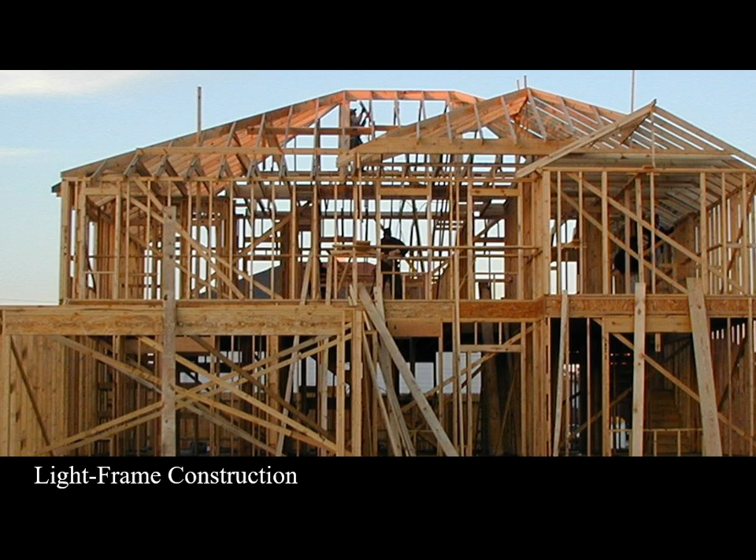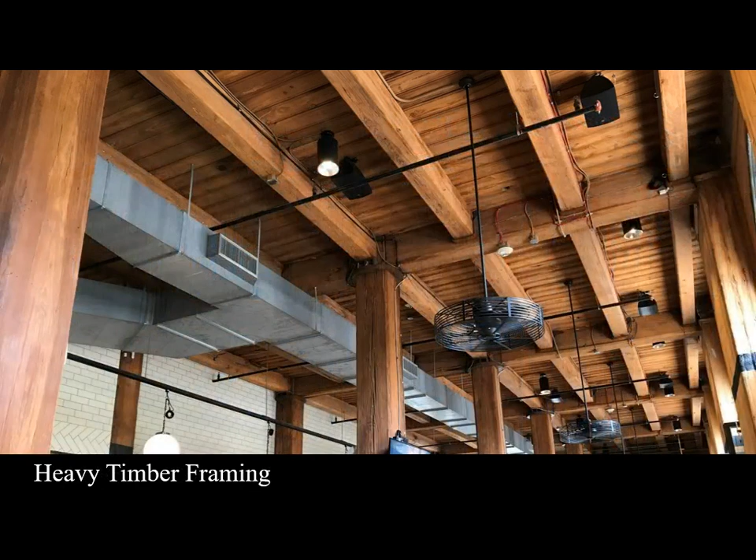When we think about wood construction, this is probably the first thing that comes to mind. Probably the predominant use of wood is light frame construction and residential work. We step back a little bit: heavy timber. This is a photo from the Cupples buildings in St. Louis, where our office is at Mackey Mitchell. These were built around the 1890s.

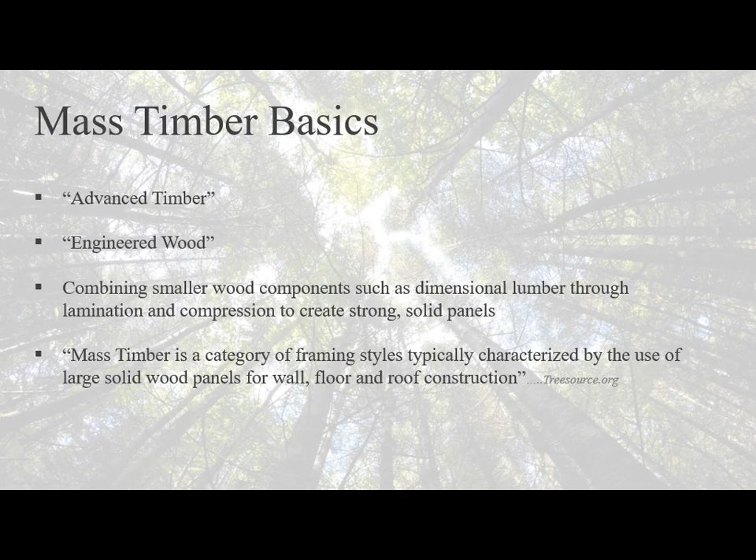You might hear mass timber referred to as advanced timber or engineered wood. Essentially, the concept is combining smaller dimensional lumber in a way to make larger panels. Probably the earliest example of an engineered wood is plywood. That's been around for quite a while, the idea of taking veneers and perpendicularly laminating them together, and it achieves great strength.

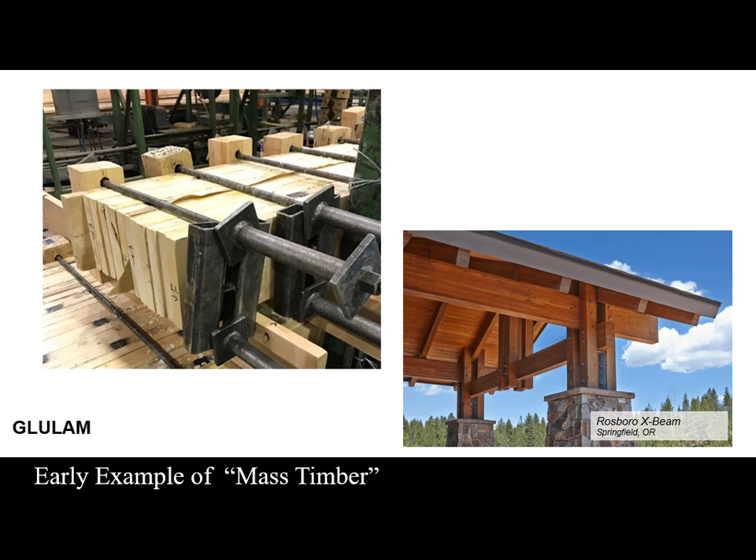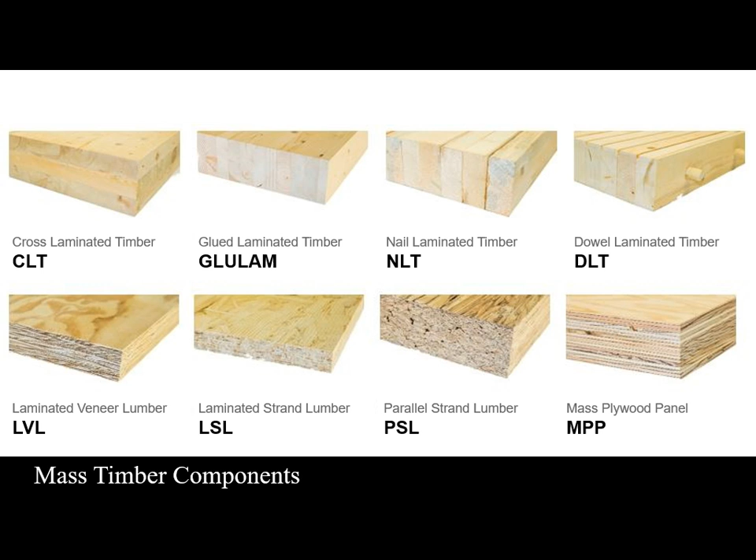The idea of biophilia, which is defined as the love of life or living systems, and the innate nature of humans being drawn to living things. There are health and well-being benefits to wood. Ease of fabrication: wood's a soft product, it's easily manipulated. Rob will probably touch a little on speed of construction.

One of the things that has helped advance this technology is that AHJs and other code officials are catching on to the capabilities of wood. There are a lot of myths about why wood maybe isn't the best material to use depending on the project, because it's combustible, it doesn't mix well with water sometimes. There are a lot of reasons. It's maybe not as strong, but in reality it is very strong when you think about the strength-to-weight ratio.

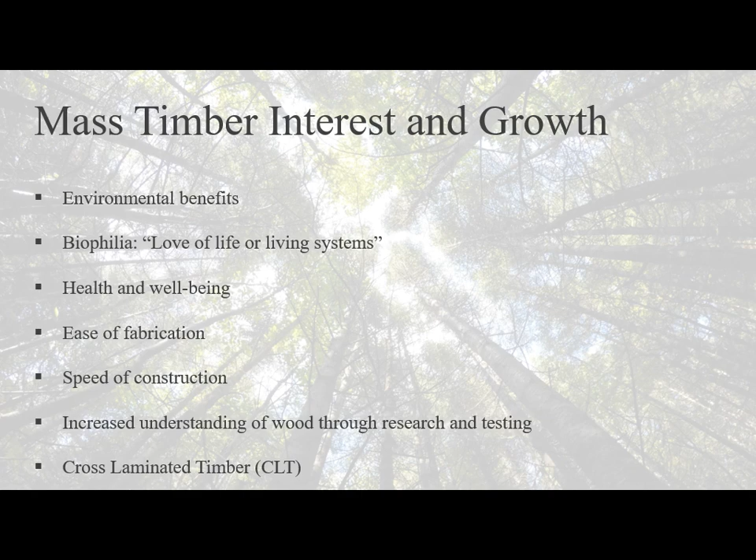Just being involved with this project, and Rob can attest to this too, we get calls all the time to talk, to ask questions, and to be on teams to pursue work, because it's really a hot topic and a very trending, popular construction type that's gaining a lot of momentum right now. So it was really just a great project to be involved with.

These CLT panels have been a big part of why there's this new boom in mass timber. These panels now can be made greater than 10 feet wide, up to maybe 12, and up to about 60 feet long. Really, the limiting factor more than anything is just how you're going to get it to a job site, how you're going to ship it.

So they're in a plant. They go through these CNC machines, and you can get very, very detailed, and tolerances are within fractions of an inch, which is great that you can do this in a controlled setting of a factory, and it solves some of the problems at the job site.

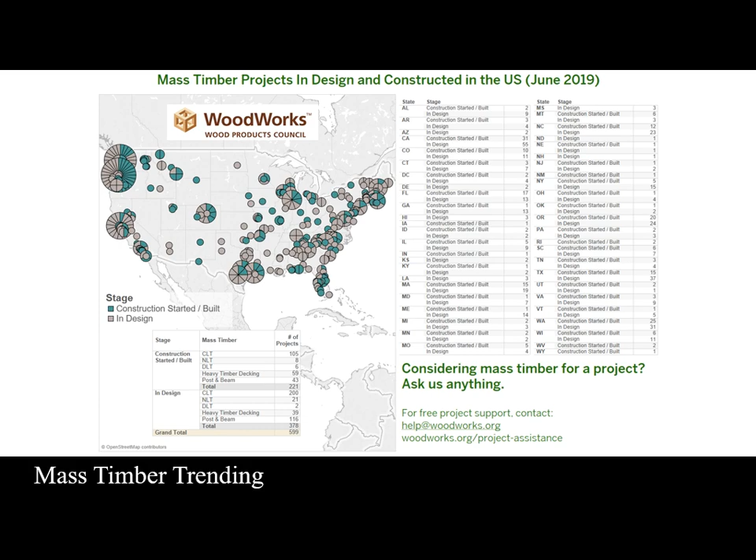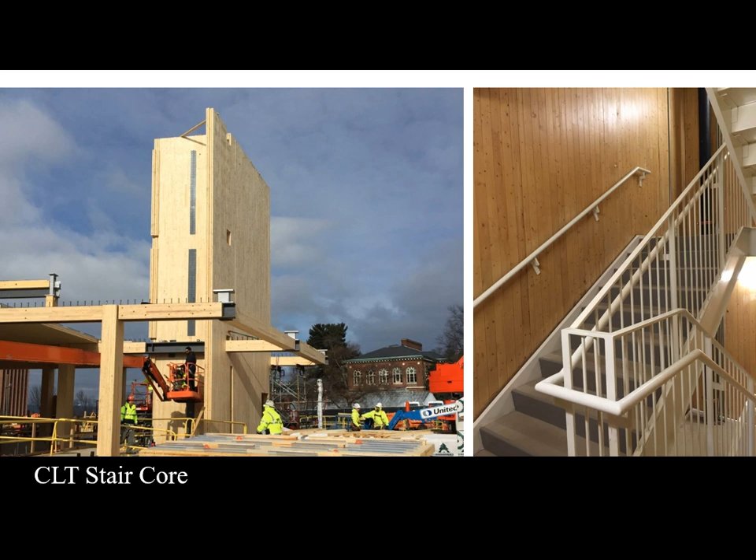Interesting, just some examples of mass timber in place. This is at the University of Arkansas with the glulam columns and beams and with CLT shear wall panels. This is Vancouver, load-bearing CLT shear walls. We even use them for stair towers, rated stair enclosures. This is at Amherst, UMass. This is a project by Leers Weinzapfel.

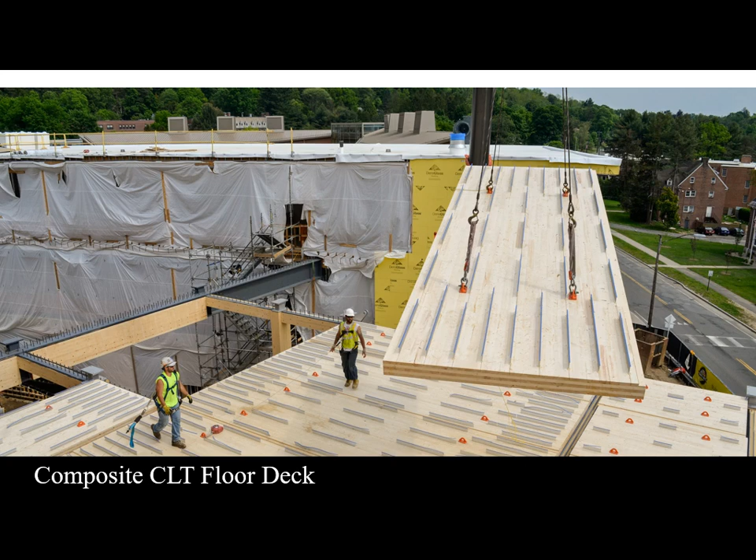Same project, showing them setting some floor panels. Typically you're going to put a topping layer on top of a CLT panel, because wood's not going to be a good material for your finished floor, or to take adhesives for whatever your finished floor might be. So you're going to use a topping. Typically at Arkansas we use 1.5 inches of a gypsum topping. We didn't need a composite slab there.

But this was an example of where they ended up using a lightweight concrete in a composite system, where those are steel fins that are embedded into the CLT, and when the concrete forms around it, it forms a composite system. And then we use them for roof panels as well.

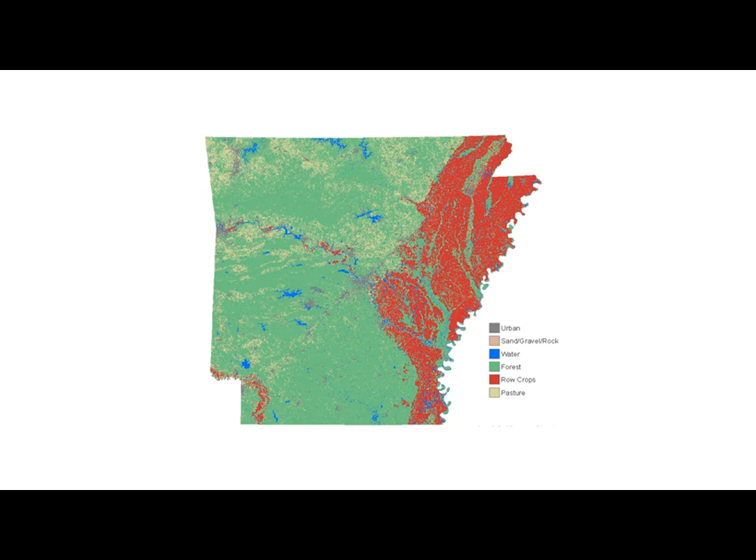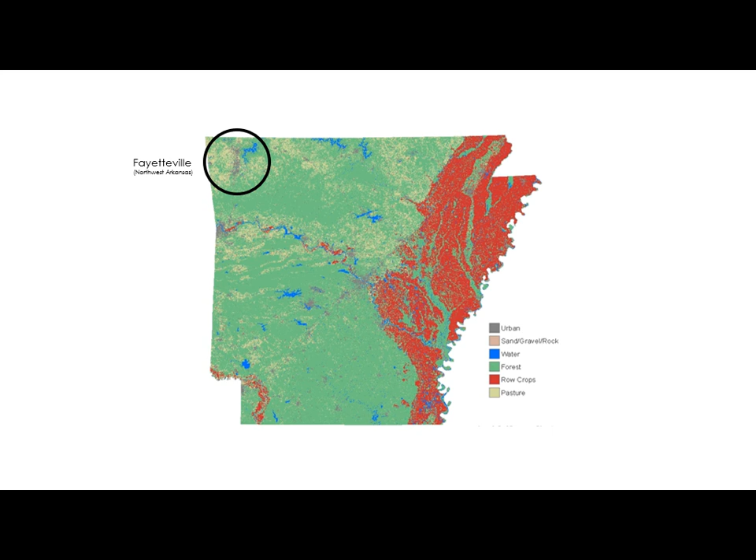So talking a little bit about the project that we came to explain, everybody knows probably where Fayetteville is in northwest Arkansas. We're only a couple hours away from it here. So the state of Arkansas, amazingly, has 4.7 million acres of certified forests. And so that is part of the interest and the reason why the university wanted to pursue that.

Dean Peter MacKeith at the School of Architecture sent some information to me. I'm going to read it. This speaks to kind of what their motives were for pursuing this building. Advanced Timber Technologies, or more simply mass timber, appealed to the University of Arkansas on this project for its triple bottom line deliverables of demonstrable educational value, demonstrable environmental value, and demonstrable economic value.

The Adohi Hall is not the first mass timber campus facility at the U of A. That distinction belongs to the Library Annex building, which is the photo I showed you of the example, which was dedicated in the fall of 2018, nor will it be the university's last mass timber building. There are at least 2 more envisioned in the next 5 years. But it is the first to be so explicitly specified in the RFQ, the largest mass timber campus building constructed to date, and the one most greatly anticipated, given the scale of the budget, the prominence of the site, its multi-story height, and the diversity of its program.

Mass timber appealed to the university and its design, engineering, and contracting partners for this project for its simplicity and speed of construction, its versatility in both short and long span conditions, and its psychological and physiological effect on the interior quality of the spaces. The promotional value of the project should not be underestimated either, as the project signals a university committed to progressive design and innovation, to sustainable design, and to a vital quality of on-campus residency.

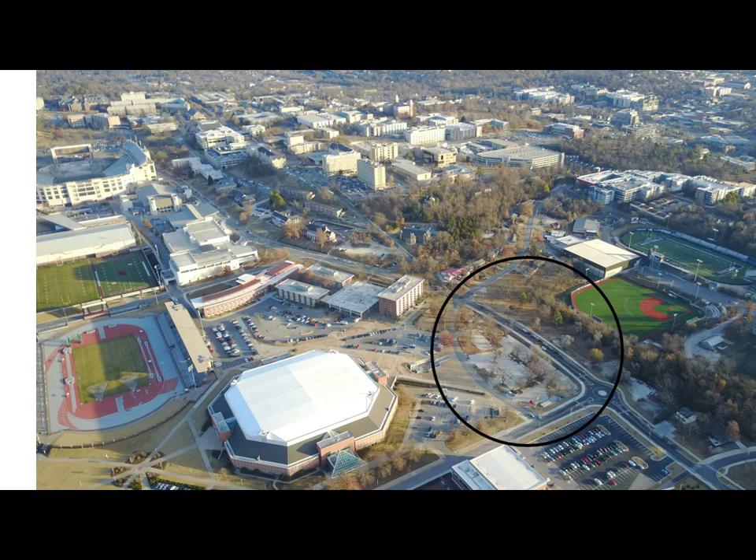Of course, Arkansas is a beautiful state, and the Ozarks are a tremendous asset. One of the common themes of our project was a cabin in the woods. And so in our early planning stages for the building, I mentioned earlier that we had a mix of semi-suite units and traditional bedroom units. This isn't the actual unit that we ended up with, it's just one of our design images.

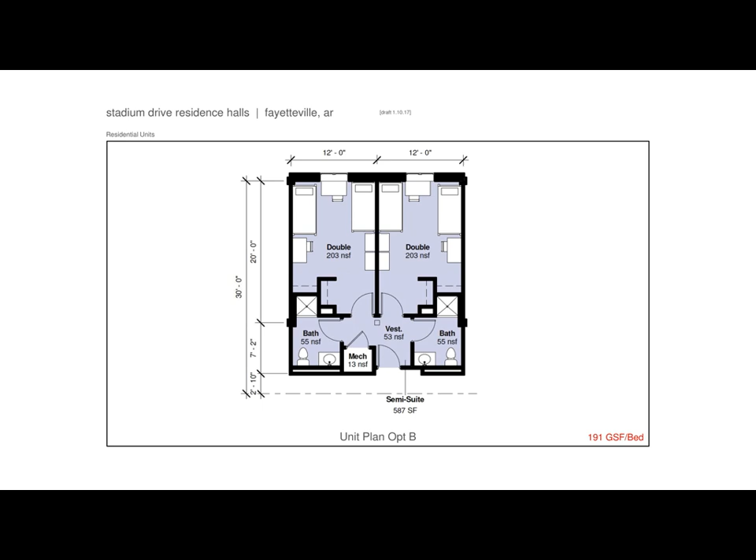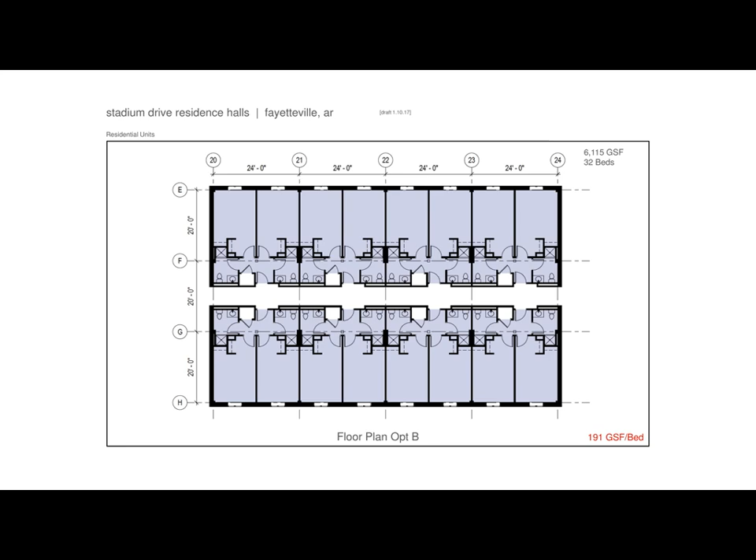So in a double-loaded corridor, these bedroom units become so important in residence halls, and the efficiency of them, because when you're repeating these units times 100 or times 200, just a few inches here or there makes a significant impact on square footage and cost of the building. So one of our early focuses is always to be very efficient with our planning. The most efficient layout for a residence hall is typically a double-loaded corridor. So you create these bars.

How mass timber factored into how we laid out our typical units was we established an 8-foot by 40-foot as an ideal CLT size for our floor panels. That worked with the grid spacing that we're showing here, 12-foot demising wall center to center between bedrooms, and then a 40-foot wide building for the CLT panel. Now, there are some manufacturers that had the capacity, even back when this was built, to make them a little bit bigger, maybe 9 or 10 feet, and you can get them even bigger and longer now. But we didn't want to rule anybody out, and we wanted competitive bidding, so we picked a common size that we knew a lot of the fabricators could provide and bid on.

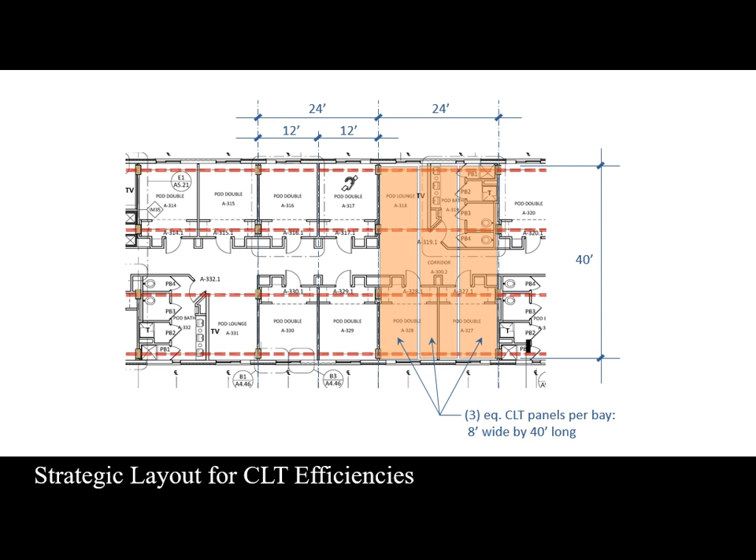So this module worked out great for our traditional bedroom wing, what we call our pod wing, that utilizes community bathrooms. With three 8-foot wide panels by 40 feet, very efficient, not a lot of waste, not a lot of cutting. On the semi-suite wing, because the building's a little bit wider with bathrooms at every bedroom unit, we'd use a full 40-foot panel, and then cut a full panel in half and utilize it on the other side of the building. A very efficient way and very thoughtful from the very early stages. And regardless if this building was going to be steel or mass timber, this was going to be our grid spacing. So we carried this through even with our steel concept as well.

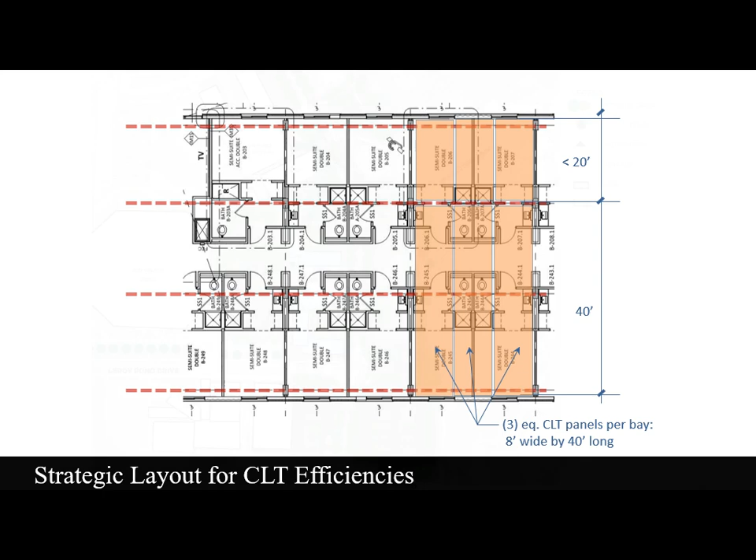Just showing you some design images of how the project evolved. We decided, based on the linear nature of the site, the slope, and the quantity of beds, that it made sense to split it up into two buildings. The north building was called Building A, the south building was called Building B.

Is this a pointer thing?

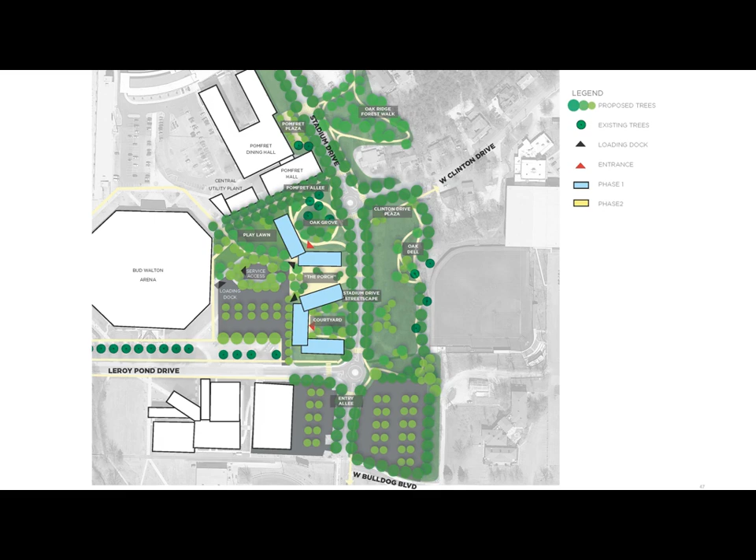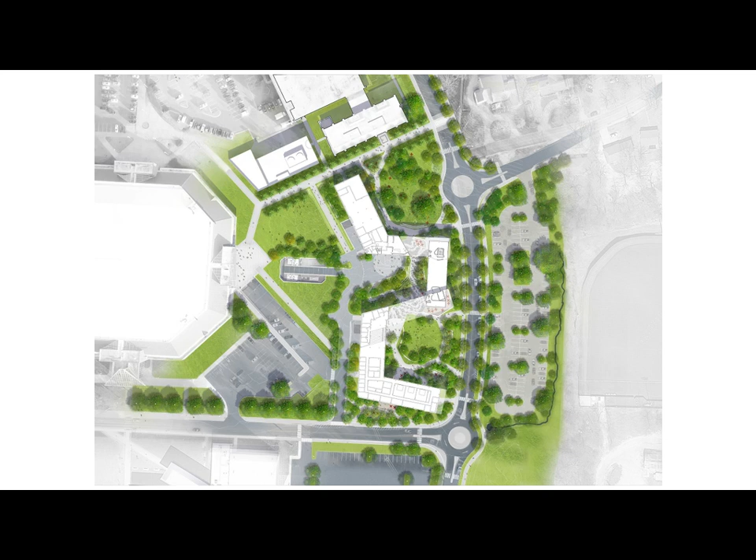One of the interesting things about the configuration of what we ended up calling a serpentine scheme: we looked at several schemes, but this is the loading dock for Bud Walton Arena, where the semi-trucks have to service the building for deliveries. Our site is butted right up against that drive. So the shape of our building had to take into consideration that the semis need turning radius and to back up. So we factored that into our design. Just a little bit of a blow up of it.

Pomfret, which is next door, is another residence hall. They hadn't built a residence hall, and this is the first residence hall in 15 years at the university. So, along with being a residence hall, this was intended to be a living, learning community as well.

So, in the south building, the B building, these spaces were designed for the arts, and so we've incorporated some maker spaces, faculty offices, there's music rooms, there's some video production and audio production studios, and then there's like a movement studio or dance studio, and then there's a really nice kind of a tiered seating with a high volume amphitheater space here.

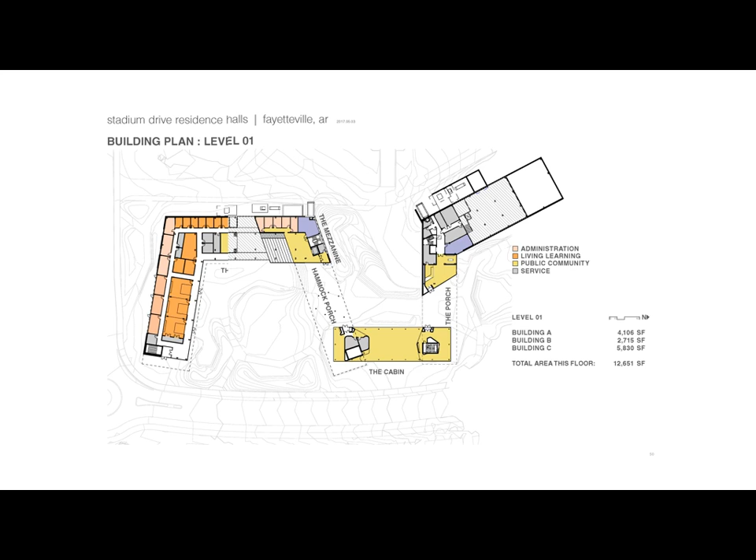And in the north building, here's the main entrance to the residence hall, so this is where the students will enter. And then the cabin, the connecting building, is only a one-story building, which is kind of the social heart of the building where everybody comes together, very transparent. Typical residential floor, again, I mentioned the wider wings are the double semi-suites, the more narrow wings are the pod wings.

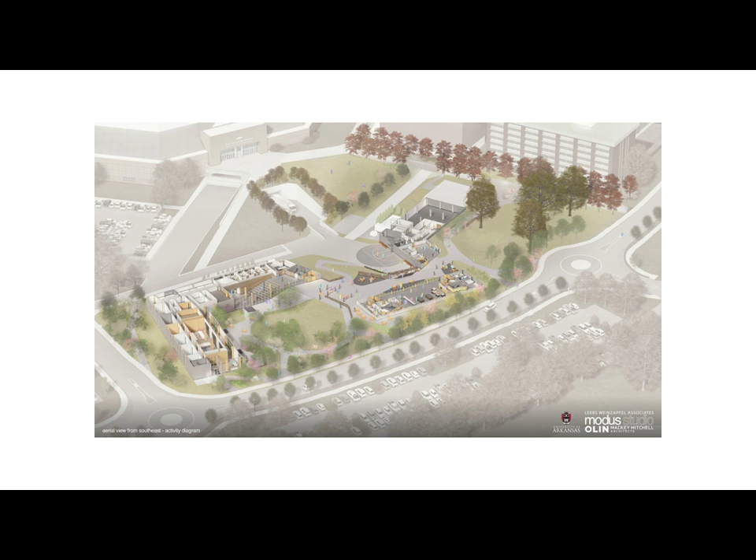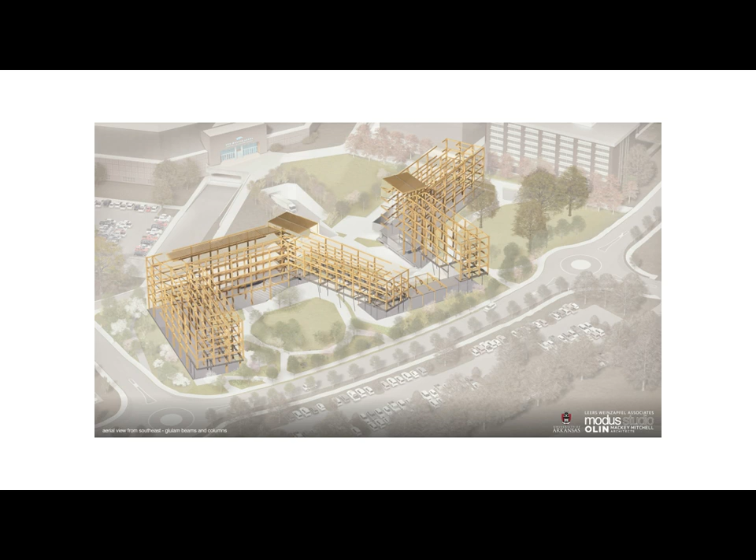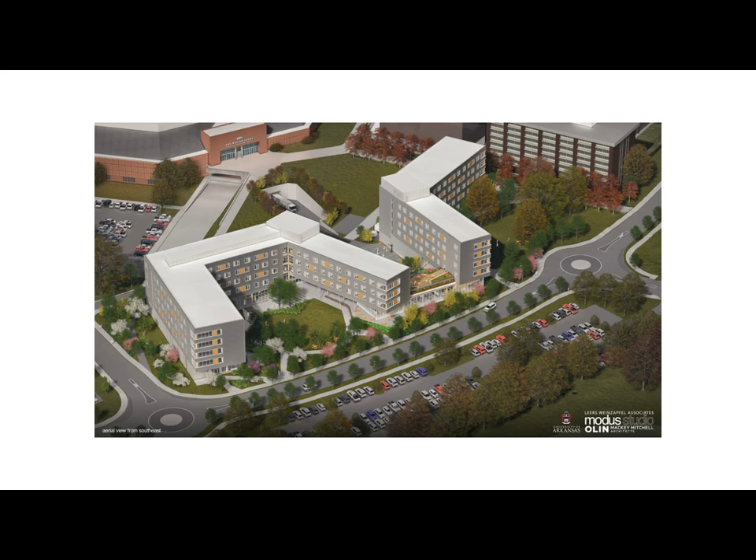Here's an axon of a cutaway of that first level, showing the makerspace and arts department with this tiered amphitheater. Here's the cabin, the social, kind of the living room, and then the first floor of the res hall. And of course, here's an illustration of the glulam post and beam structural system. And then we layer on our CLT floor and roof panels, and then ultimately one of the final renderings of the completed design.

And the university was a little bit leery about, one of the hesitations for using mass timber was, we're not familiar with it. We're worried about it. It's flammable, all those things that a lot of people are concerned about. So ultimately, we didn't even pursue using CLT for any of our shear walls. So all of our elevator and stair towers are poured in place concrete.

They also didn't like the idea of exposing any wood to the exterior for maintenance reasons, understandable. There is a little bit of wood on soffit conditions. You'll see some photos, but the building is skinned with metal panel. And because part of this is promoting mass timber and the Arkansas forest industry, we wanted to highlight, and so you'll see in some photos later that wherever we could, we tried to capture large glass windows that had a lot of exposed wood that you could see from the outside. So even though we didn't use a lot of wood on the outside of the building, on the inside there is a lot, and we wanted to make that visible.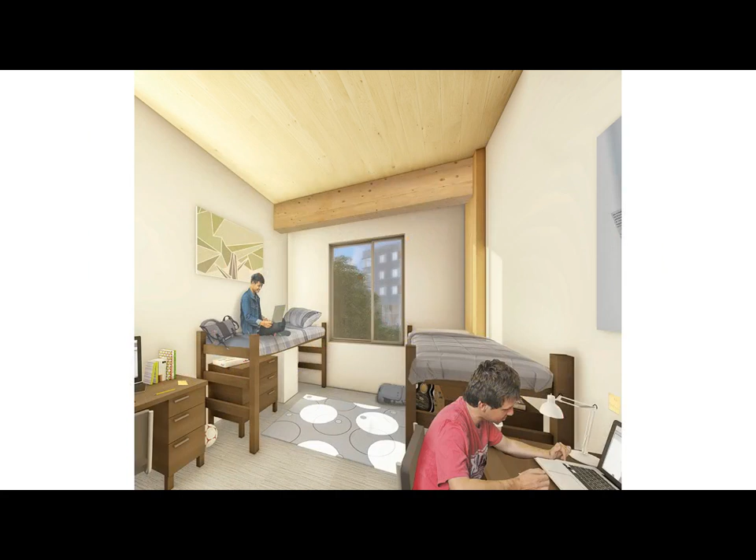And so one of the key things was trying to condense all of our utilities, our systems, MEP, FP, telecom, sprinkler piping. As much as we could, we tried to condense that down the corridors so that we could maintain a really nice volume in the exposed CLT floor panel, along with the glulam columns and beams in the bedrooms. A long way from Turner Hall here at Drury, which was my first residence hall. Another shot of just one of the final renderings of the project.

Now I'm going to let Rob step in and talk a little bit about construction and lessons learned. Thank you. That's a great job. I know a lot of you were maybe at the White River Conference Center about a year ago when we did a presentation on this project during construction. And I had to fill in and do Greg's part that he just did. So that was a whole lot better than I did it.

So this was a real collaborative effort, and this type of construction does require collaboration. We got together with the design teams, the owner, the user groups, and took a trip to Vancouver early on. And like Greg said, there was a little bit of opposition, but a little bit of just uneasiness about the unknown of using wood. And so a lot of people had to go and kind of lay eyes on it and be convinced.

And one thing that really struck me when I was in Vancouver, we went and saw several facilities, and in a lot of them, the wood was real prominent and was featured and exposed. But what struck me was the number of facilities that we went in that were complete CLT and wood mass timber structures that you didn't even see the wood. I mean, everything was concealed.

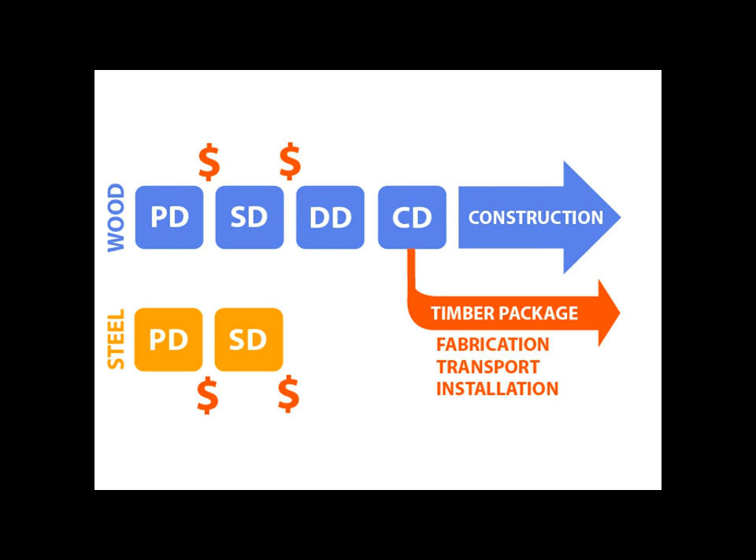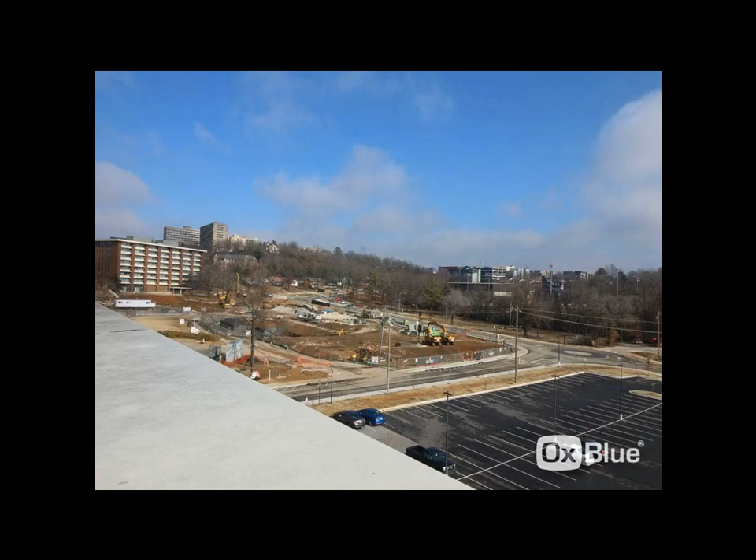I want to start off here with a couple of time-lapse videos. This will really illustrate all the work that goes on for about 6 months while we were getting ready for the timber to arrive on site. What will be striking in this video is how much happens, and once the timber arrives, how quick that timber goes in place. You see a lot of the concrete stair cores going up that Greg mentioned.

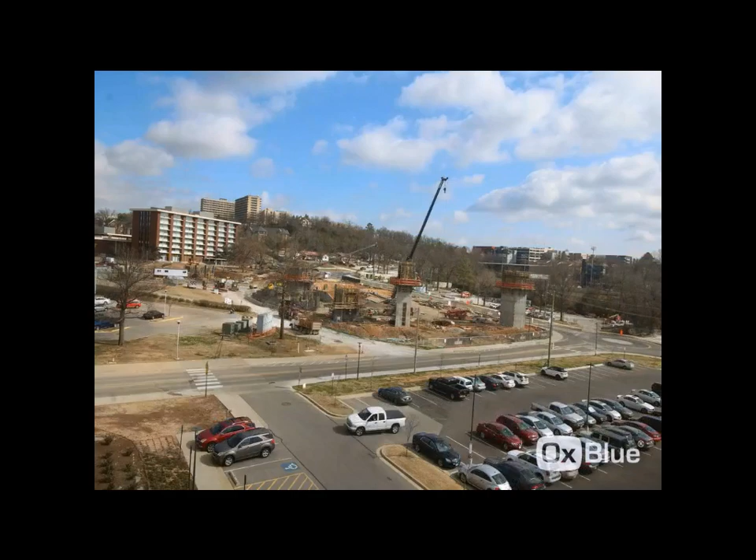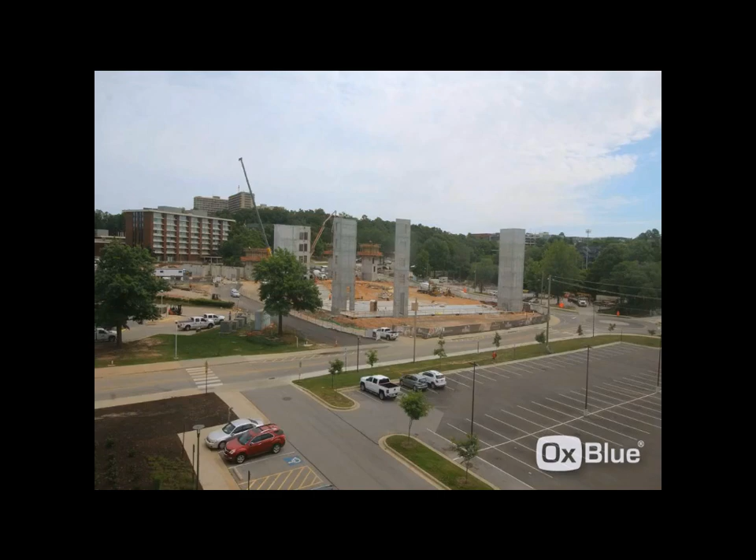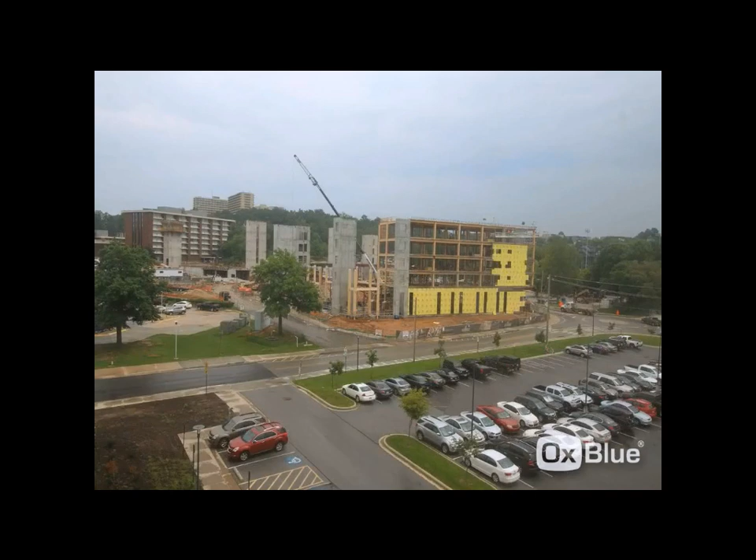Now the timber's arriving and going up. And you can see as soon as that timber goes up, you're skinning right behind it too. So that was kind of early on in the job, but I think that's real striking to show how quick things happen once the timber arrives on site.

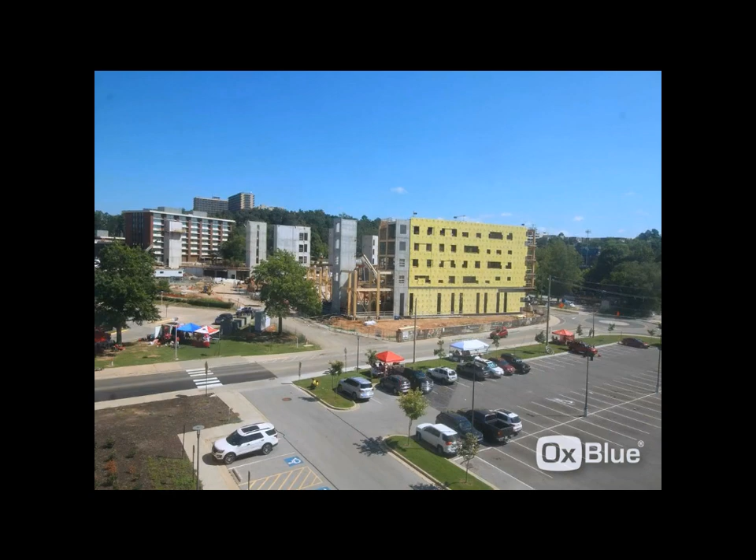Greg mentioned the logistics of this job. It was really challenging. As mentioned, this is Bud Walton Arena with the loading dock right here. One of the earlier photos showed this street coming through right here, and it used to continue. This was the truck route. And not only did the street run through here, there was a lot of fiber optics and gas lines and a spaghetti network of utilities underneath here. So a lot of that had to be moved before we started. There was a deep excavation in the basement right here.

Another unique structural system on this job was the use of rammed aggregate piers as a soil stabilizer. I think they had 1,100 and something rammed aggregate piers on this job. But we had to shore; this had 18-wheelers coming in just a few feet away from our roughly 24-foot deep basement excavation along this wall right here that we had to engineer and shore up.

And like Greg mentioned, the trucks came in here 2 or 3 times a week throughout construction. We had to keep this open at all times. There was either basketball season or concerts or something going on there all the time in Bud Walton Arena.

So that was a real challenge, and that also got into some of the efficiencies, like if we could set up a self-erect tower crane; there were some things we couldn't do because of having this area. Luckily, we had this yard across the street where we could bring trucks in and unload, and I'll show some photos of that in a minute, and then truck them across the street for the day's work and put them in place. Not ideal, but it worked out pretty efficiently. It wasn't as ideal as being able to pull trucks in, pluck them off the back of the trucks and set them in place. But it worked out all right.

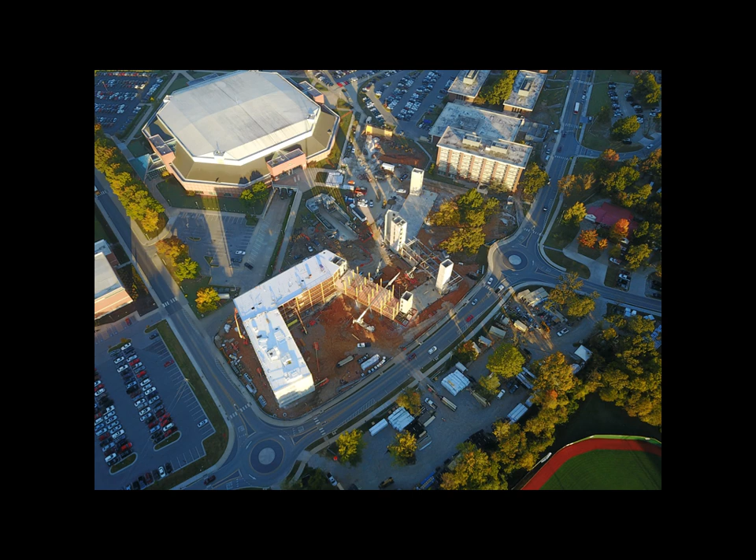Here's some of what I mentioned, some of the yard storage and the transport. When these trucks came in, we had this material sourced in Austria. We had 5 fabricators that we invited to participate, and when we got the timber package available to go out to bid, we had a competitive process between 5 fabricators.

60% DD phase. We tried to bring them in, and the thought behind that was to allow all the design to be finished with the manufacturer that was going to actually be on the job, so that everything would be detailed to the way that they did things. Some of that worked out. Some of it, the timing wasn't great, but that was the intent. And we ended up with Binderholz out of Austria. So this was Austrian spruce.

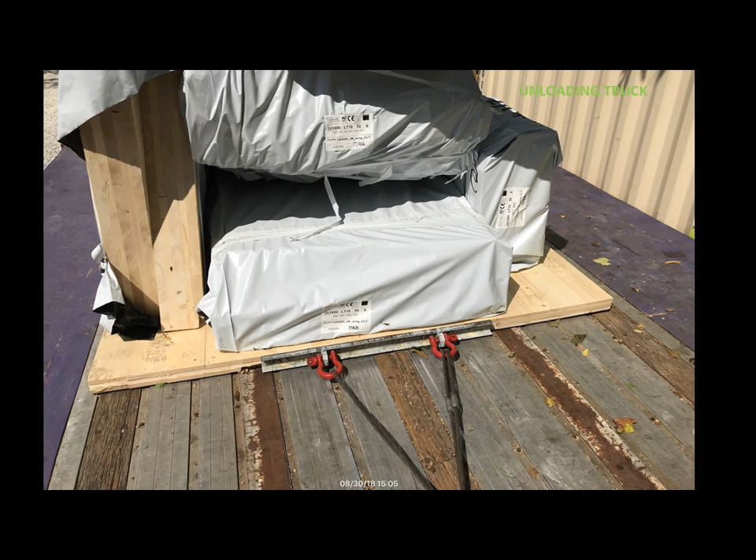This was a really neat device that Binderholz provided. They screwed this into the end of a dunnage panel. There's some neat stories behind these dunnage panels as well. They used a lot of those to make some of the furniture that's in the building, and you'll see in the final photos here in a minute, and it's really cool.

There was also, do you know the story about this being sent to New York and used in that village? No. There was some kind of collaboration with the University of Arkansas, and there's a story on it. You can look it up, but some of these dunnage panels that everything was shipped over on were actually sent to somebody in New York, and there's some kind of small structure that was built with a lot of these dunnage panels there. So nothing went to waste. But these were screwed into the end of the dunnage panel and then just loaded off the trucks.

And we had 125 shipping containers that came over from Austria to a port in Houston. And then J.B. Hunt Transport, which is a local trucking company there in northwest Arkansas, we arranged for them to pick these loads up at the port in Houston and transport them to site. And they gave us 45 minutes to bring them on the site and get them unloaded and sent back.

So we had to sequence everything, the right panels and the right containers at the right time, and had to be real efficient to get these things in and unload them. And we only had room for about 4 of these on site at any time, so we had to be real good about getting these things unloaded.

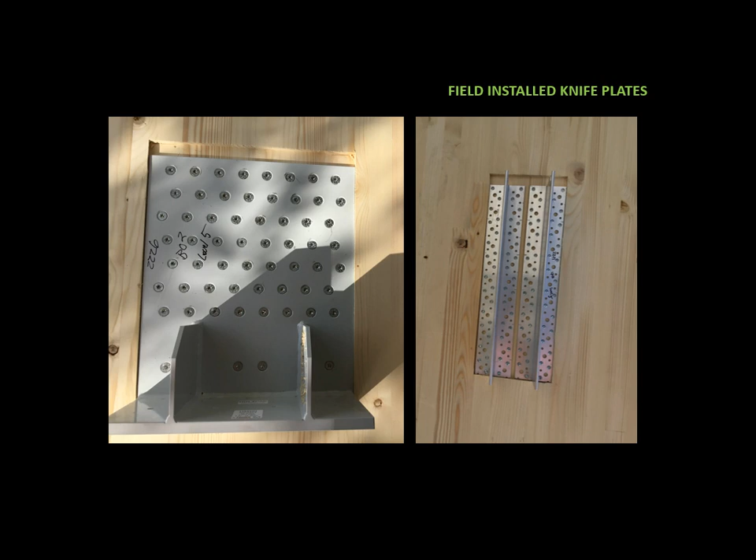These are some knife plates. This is a lessons learned thing right here too. You can see that a whole lot went into some of the connections. Some of these connections had like 300 screws in a single connection, and there were 2,500 connections on this job. Some of them can be done in the shop. That's an efficient way to do it, but it's not an efficient way to ship them.

If all these knife plates and connection plates are connected to columns and beams at the shop, they can't load them into the containers efficiently. So the first 4 or 5 containers that we received on site were nothing but these plates and screws. And then we set up a small army and a whole lot of screw guns and a whole lot of worn out elbows, and set up an assembly line and connected all these things as they were being shipped in.

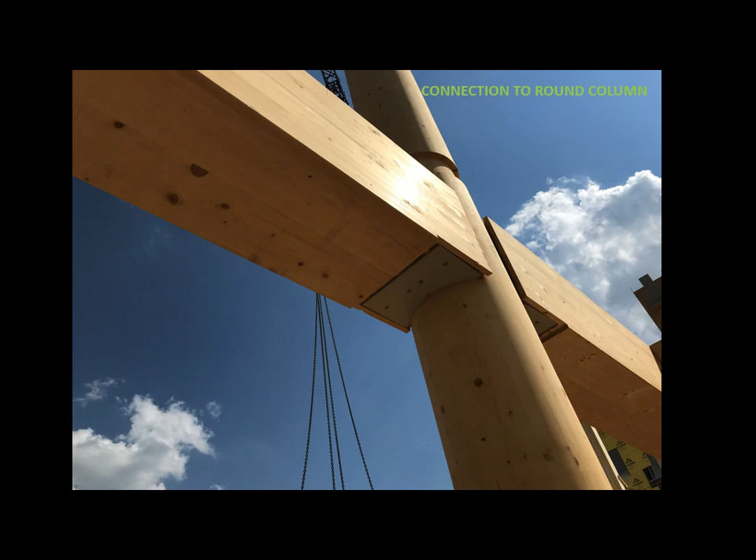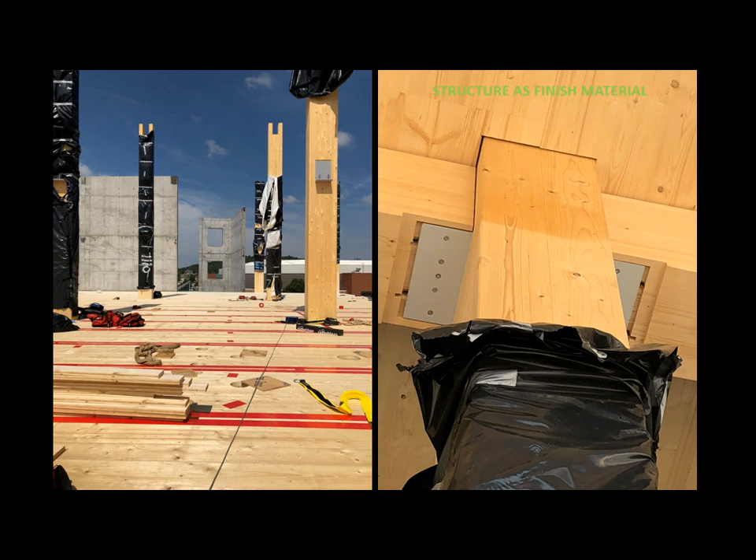One of the challenges that's a little bit different is when you're working with structure as a finish material. Usually when you're throwing up steel and pouring concrete, you're not worried about the structure. In this case, as soon as that structure was coming in, there was an immediate need to protect it, both from just the rough construction nature of lifts and everything that happens on the job, plus exposure to rain.

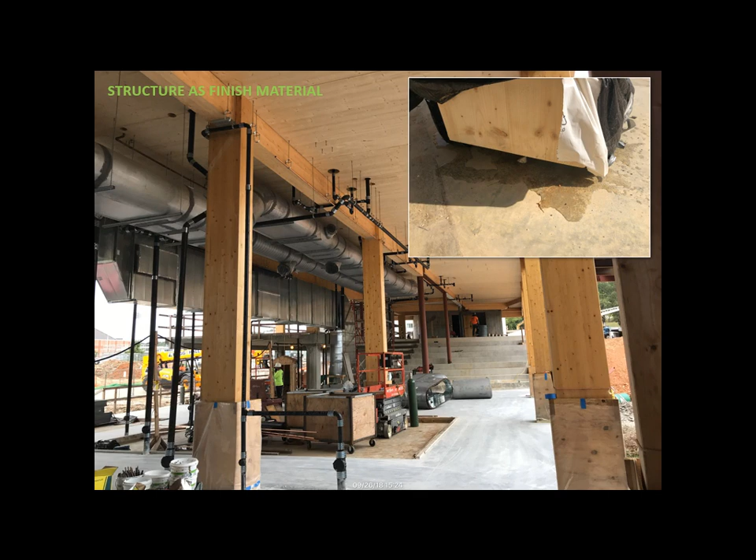You can see some of the steps that we took right here. All these columns that went up, we encased all the bases with plywood up 4 feet high to keep these things from getting damaged during construction. Everything was raised up off the concrete 4 inches. They had bases, and there's a detail of that coming up here in a minute.

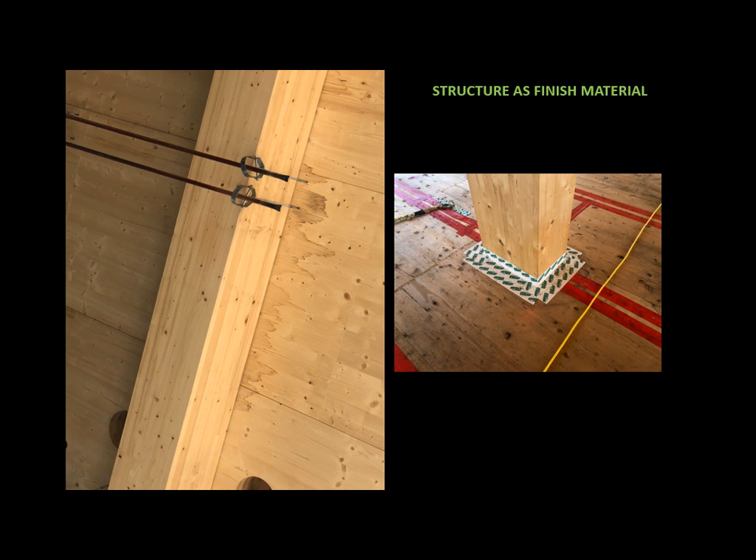You see, we had a little bit of this on the job, very, very minor. Some of the places that this occurred were in areas right along the edges that had walls and were concealed by sheetrock later on anyway. Honestly, we had very, very little staining that we had to deal with on the job.

You can see some of the steps that we took right here to protect where columns went through the floor. We sealed those up. We taped all that. This tape was not necessary for the system. But once we put the adhesive down and the screws, we also went right behind it immediately and taped all the joints. And it worked really well.

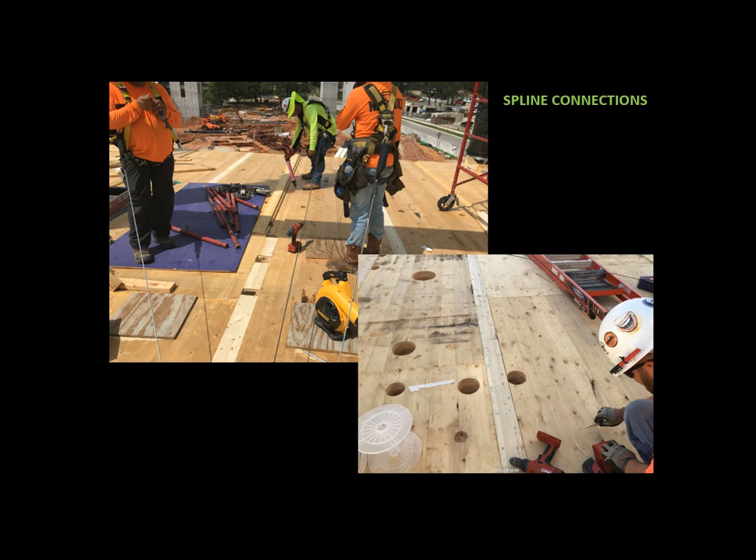That right there is right on top of that, and that is the exposed ceiling in all dorm rooms. So that's going to be your weak spot. If any moisture is on there, it's going down through that joint. So we had to protect that. Again, here's the spline connections.

The penetrations, part of the collaboration: there were 3,768 holes that were 3 inches or larger that were drilled in the shop in Austria before these were shipped over. So if you let that sink in, think of the work that had to be done on the front end and all the design that had to be completed to know exactly where 3,768 holes went, the size of the holes, the size of the insulation that went around the holes, and the annular space, and put it in a 3D model, and get all that done for 202,000 square feet before you pull the trigger and send these panels into the shop.

So that's where the collaboration on the front end is key. And the shop drawings were quite an experience. Not to mention it was metric too. And I think there was probably less than 10 on the whole job where holes had to be either plugged or re-drilled. And in each case, it wasn't a misdrill, but it was a change in a room configuration or something. And that was easily handled as well.

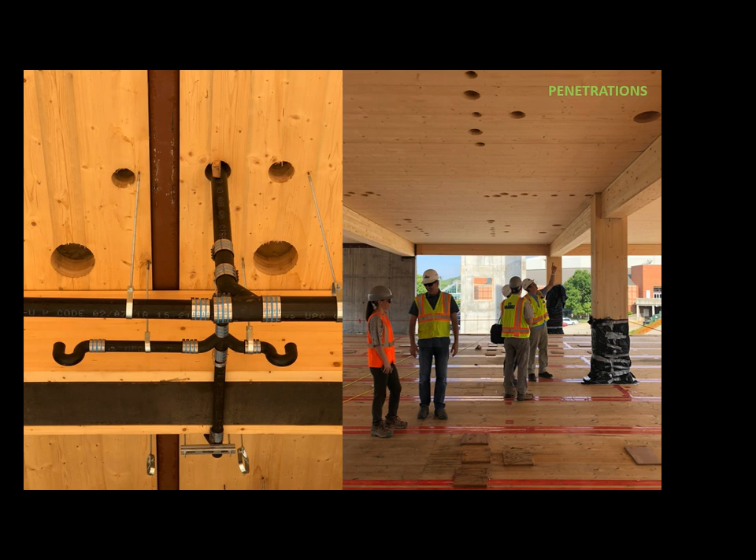Cool thing too is that once these shop drawings were done, all this stuff right here, it was amazing: when the glulams went up and the panels were set in place, they were right behind it with pipe and hanging it up, because it had all been fabricated in the shop already. You already knew where everything was.

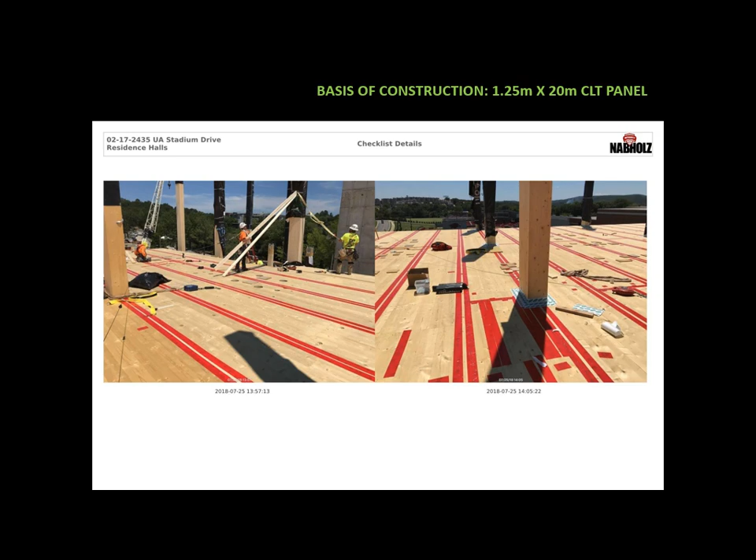And it was really hard; with some of these splices, a couple of things happened. The splices in these columns occurred within the floor plane. So that meant that the floor at the elevation of the splice could not be in place until the next column was set and the splice was finished. And so in a lot of cases, we had 4 and 5 story columns, a 2-story and a 3-story that came together, and the only floor that we had to work off of was the first one.

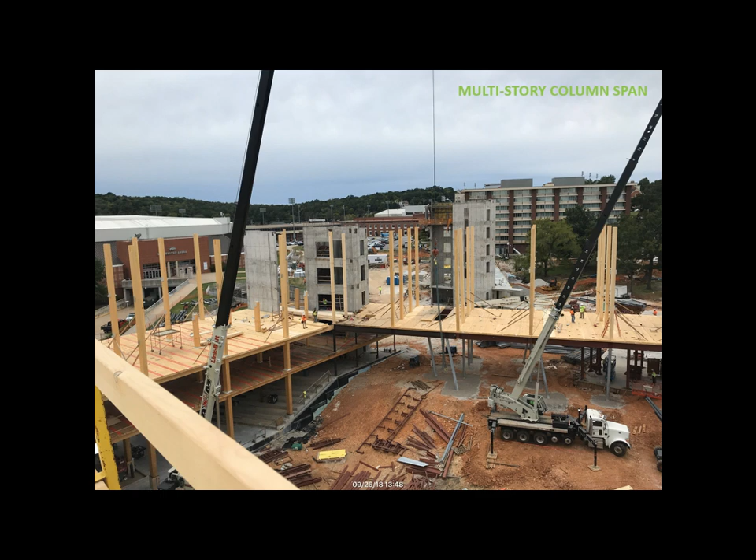Because the splice occurred at floor 2, but then we had columns going up another 3 floors, we had to apply an elaborate scheme of bracing these tall columns while we were getting the rest of the floor plates on there, instead of something real simple of putting the floor in and working on the next floor off of that deck. So it seemed like there were some good points to it, but in the end, that's something we would definitely do different. Yeah, you can see an example of that right here. That was a real challenge.

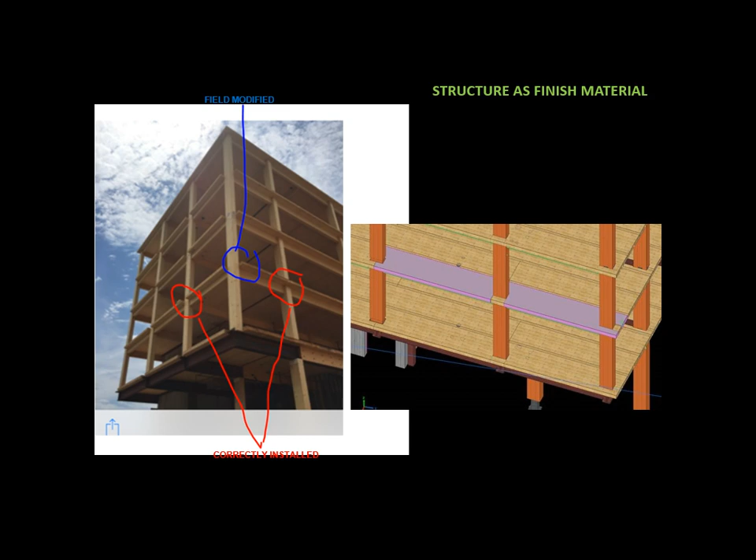Again, I mentioned the structure as a finish material. We had to do some notching on some panels on the corners because of these multi-story columns, and setting them in there. We had some cutouts that we had to come back in and pull back in later. You can see the challenge of setting something. If that's not left out and this corner's not left out, you can't physically drop that in and get it in place. So we had to come back and do some things there. Kind of shows that.

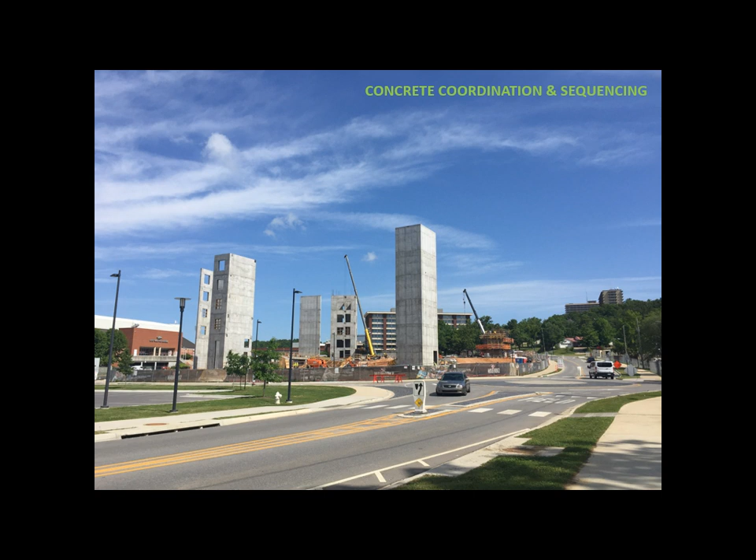Greg mentioned this, and it's worth pointing out. This was a big timber job. I think just the purchase order for the timber alone was about $5.5 million. But even with all that timber, we actually self-performed the installation of the timber on this job too, in-house.

And the cool thing is, we've done some steel erection in the past, and we've got a good carpentry crew. And we sent teams out and saw some of this happening out in Portland, and decided to take it on. It really wasn't that frightening, and it worked out pretty well. I think we would do it again. We are doing it again right now. So it goes together really quick with a good lead person and a good crane operator, and then just skilled carpenters.

But the coordination between the other structural items: even with all that wood, we still had like a $6 million concrete package on this job, and we had a $2 million structural steel package. And you don't see much structural steel in this. There were some of the large spans and stuff that go in here, but that's where the devil was in the details, because of the tight tolerances, the wood-to-wood stuff. It's all the shop drawings, and it's all designed and detailed to go together and fit like a glove.

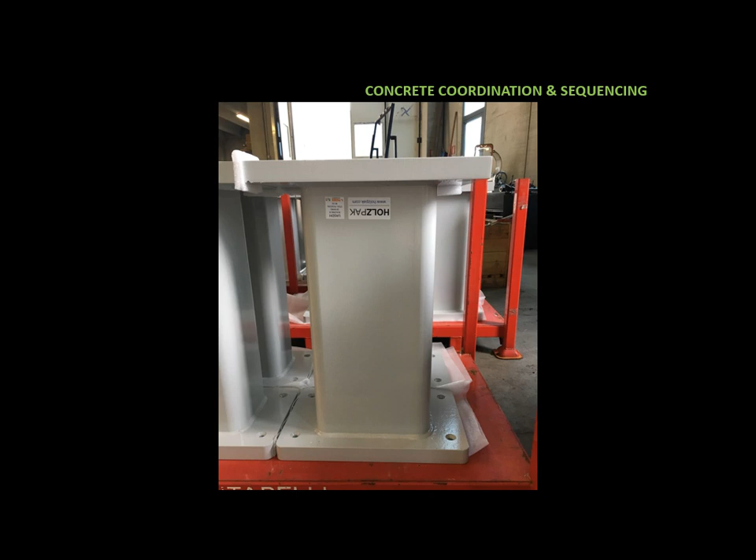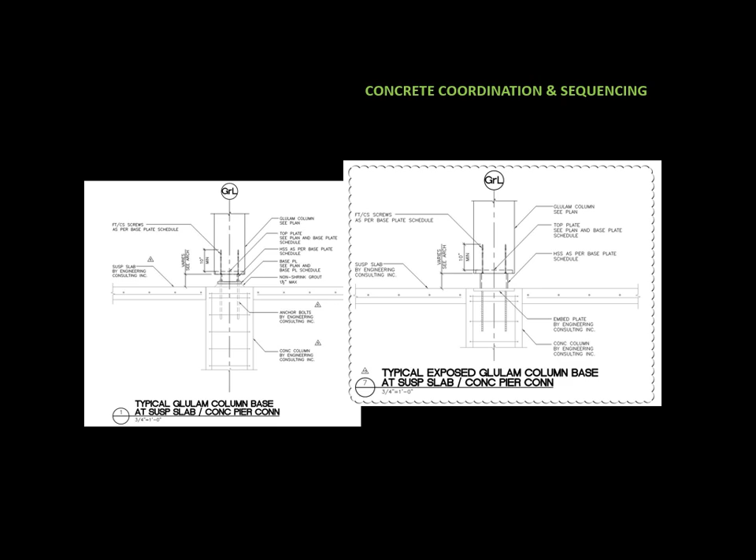Here's one of the base plates. You see how heavy they are. This went on the bottom of the glulam columns, and then connected to this was like a regular structural steel column base plate connection, anchor bolts at its base, and then elevated this up through the column block out above the floor. You see what that detail looks like. Could have shown you a cleaner picture of a column block out there. Yeah, that's a critical detail for wood to keep it off the concrete.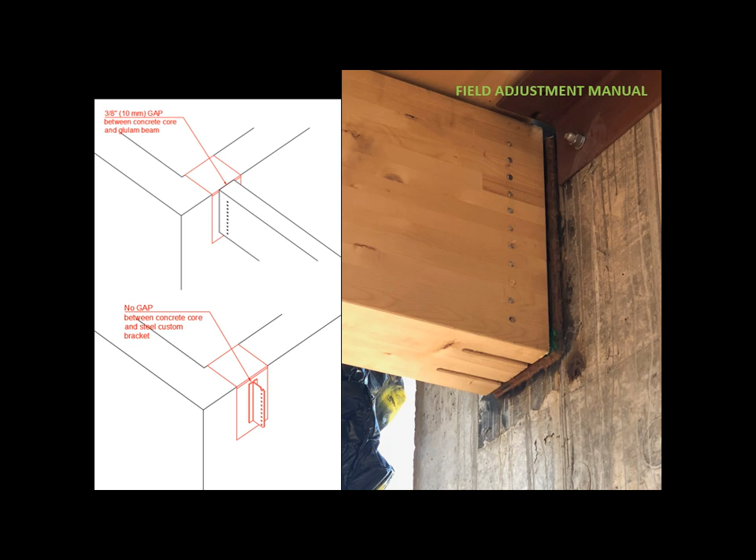We actually have, I mentioned our industrial service. We have a shop that fabricates specialty iron and structural steel shapes, and they actually came up with a jig that they engineered and built for us that we brought out to do this when we had this condition. Because these rods were driven in a precise location, there's very, very little adjustability on something right here that needed some adjustment.

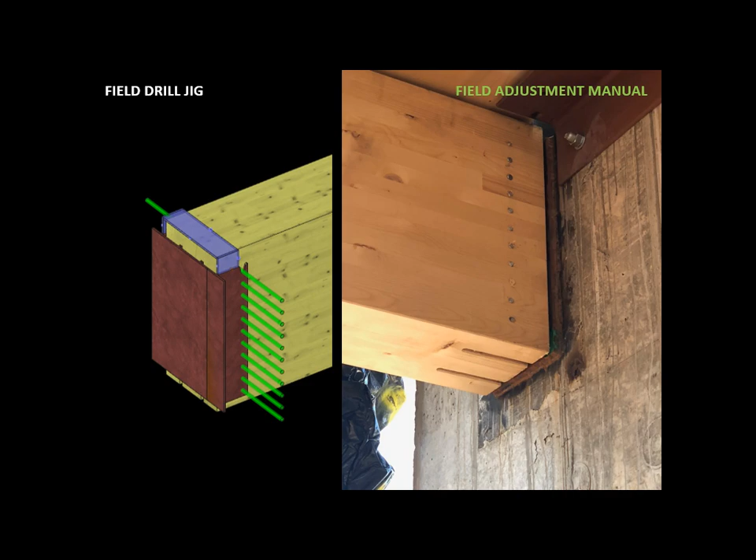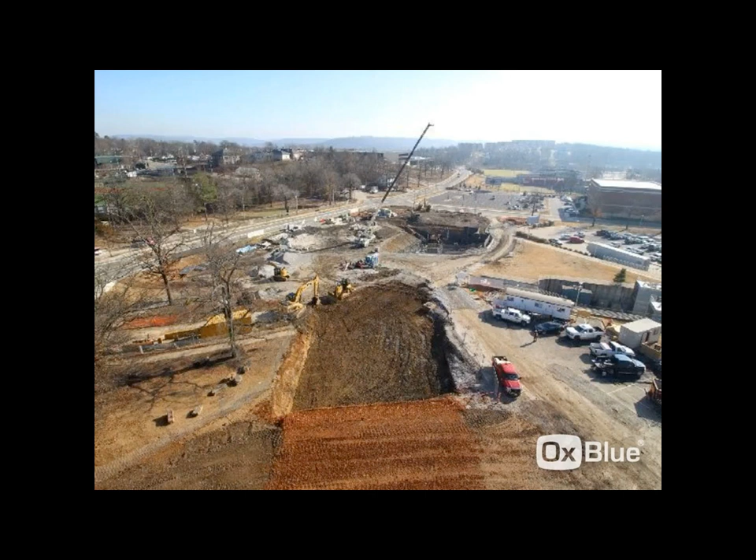All right, this is the first time-lapse video. The camera was over here looking back this way. This one is on top of Pomfret Hall. This camera is going to be sitting on top of Pomfret Hall that Greg pointed out to you earlier, and this is more toward the end of construction.

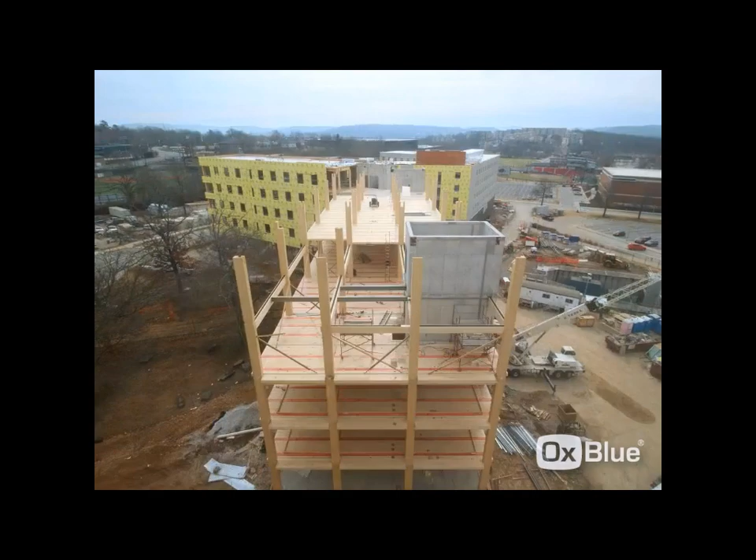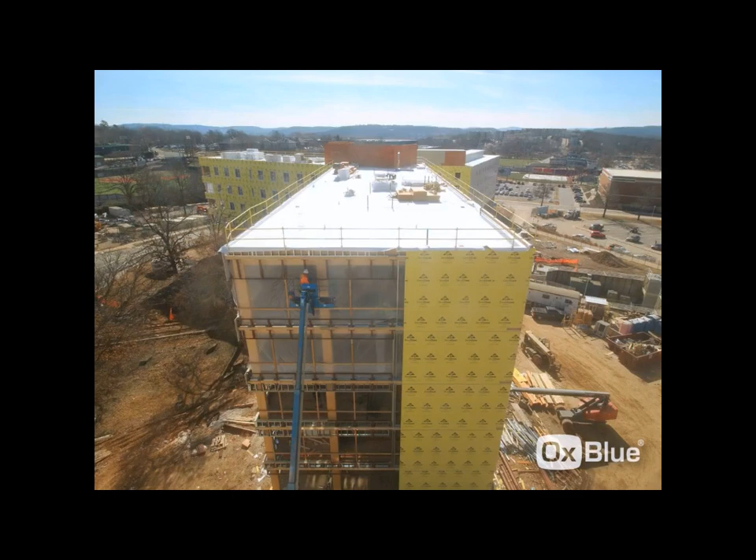Pretty cool, and like I said, as soon as the wood goes up, everything's coming along behind it, and you can close it in and start hanging right behind it. So, a couple of cool little facts to point out on this. This is a really large building, no matter what kind of building it is, 200,000 square feet. A lot of wood goes in this building.

There was about 145,000 cubic feet of wood, and I think 110,000 cubic feet of that was in the CLT panels, and 35,000 of it was in the glulam columns and beams. The wood made up about 184,000 square feet of floor area. So, you see the mass of the building, and with those kind of numbers, 145,000 cubic feet of wood.

But the cool thing is from a sustainability standpoint, and why this is popular and really gaining momentum. That amount of wood right there is regrown in Arkansas forests alone in about 4 hours. So it's a very sustainable product, and you're never going to run out of material. And that was one of the big pushes with the governor of Arkansas and Dean MacKeith at the University School of Architecture to really promote wood and get this thing going.

One of the challenges that we had on this job, and it was a great challenge to have, but we had tours on this job, especially when the wood structure started going up. There were tours on this job about every Thursday and Friday. We were scheduling around, working around. It was great to see people come from all over the country to see what was happening right here, and I can see it taking off.

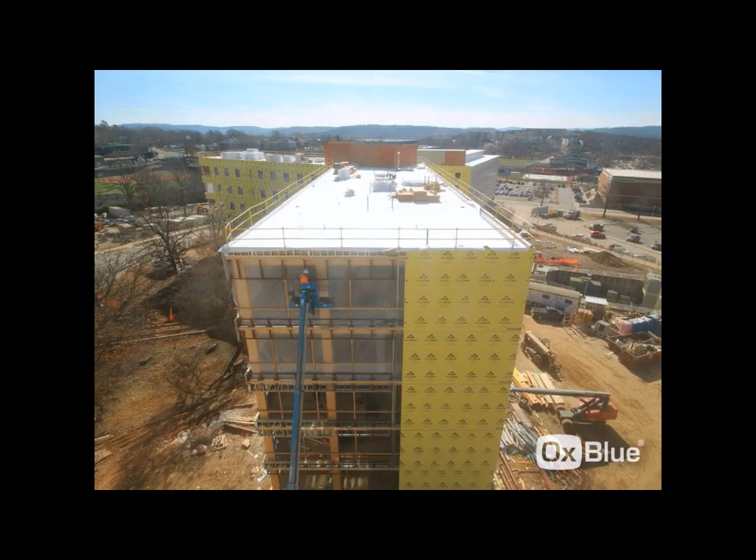Greg, I think. Just wrap it up with a couple things. Lessons learned stuff real quick. The upfront coordination. Don't underestimate the amount of time it takes up front to coordinate this. It pays off, but you've got to spend time up front to make it work.

Really pay attention to the connections and the details. We overcame a lot, but you can really be efficient with connections and details. And again, having the time up front to figure that stuff out so you're not making quick decisions that you realize a couple weeks later or a couple months later, in hindsight. One of the best decisions to make, the multi-story columns, was a big lesson learned, and again, the tolerances with other materials is a big factor. So,